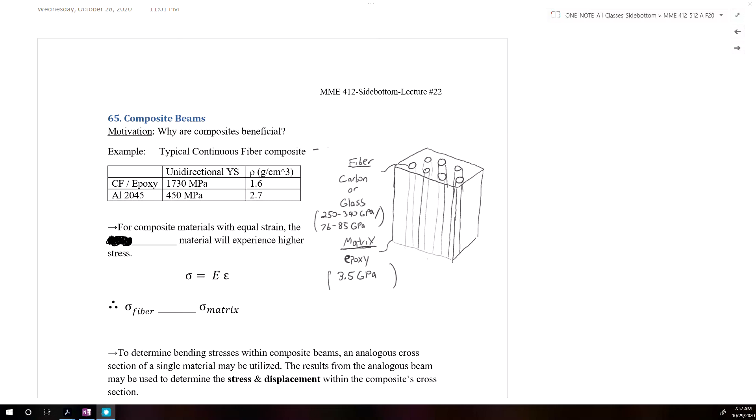So in today's video we're going to talk about composite beams. Why would engineers be interested in using composite beams? I think the major reason engineers are interested in using composites in general is that they typically provide very high strength relative to their weight.

For example, if we're talking about continuous fiber composites, often used in aerospace industry, a carbon fiber and epoxy composite's unidirectional yield strength, along the direction of the fibers, can be as high as 1730 megapascals, which is incredibly strong, while its density is only 1.6 grams per centimeter cubed. Comparing that to a typical aluminum alloy used in composites, aluminum 2045, the composite is about 4 times stronger along the continuous direction, and it's about 2/3 of the weight.

So you're saving about 2/3 of the weight, and you have about a 4 times increase in strength. So the strength to weight ratio is like 7 times higher than that of aluminum. That's an incredible savings in weight, which improves efficiency overall of the structure and gives you a little bit more freedom in your design.

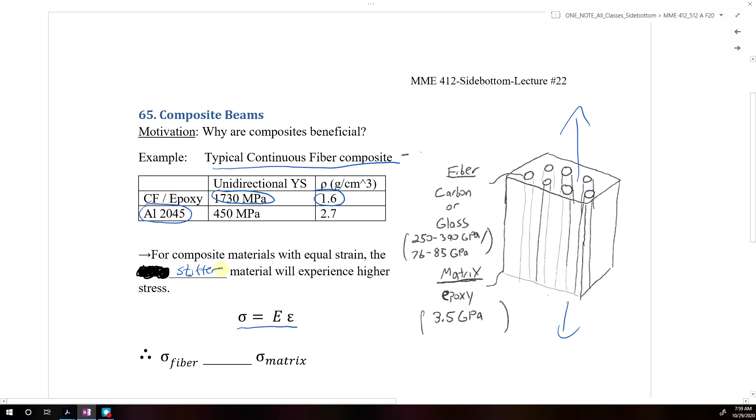When we're talking about composite materials, our composite analysis is really based off of Hooke's law. If we have a composite material with two materials in it, one material will be stiffer than the other. The stiffer material, for a given strain, will experience a higher stress. So if we have a fiber and a matrix, the fiber is much stiffer than the matrix, so the stress within the fiber of our composite is going to be much greater than the stress in the matrix.

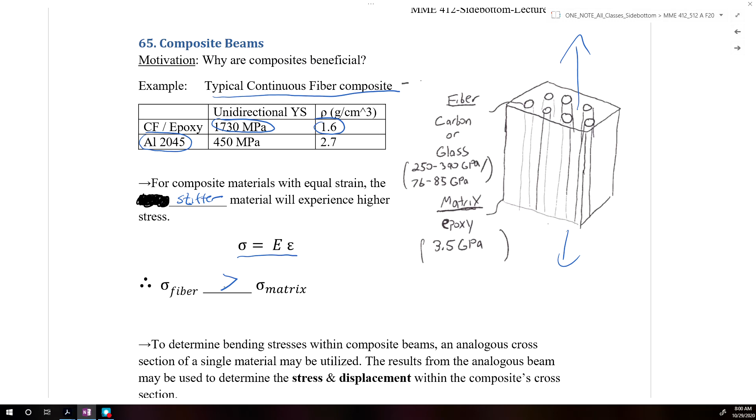What we're going to be looking at today is composite beams, and we're going to evaluate the stresses within the composite beams. We're going to create something called an analogous cross section, or an equivalent cross section, of a single material. Using this single beam, we can then determine the stress and displacement. So with the equivalent cross section, we can calculate the stress and the equivalent displacement within the composite material.

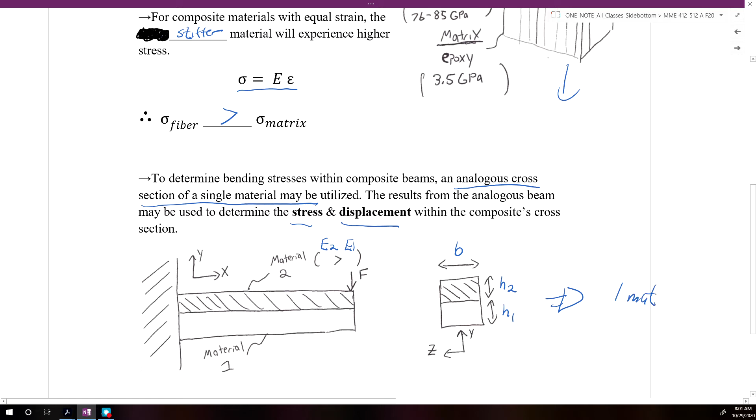For example, if we have a cantilever beam here that has two materials, material 1 and material 2, we'll say that material 2 has a greater stiffness than material 1. We're given the dimensions of the beam as having a width b, and the thicknesses of our two materials are h1 and h2. So what we're going to do is create an equivalent cross section based off of this system. We're basically going to convert this to a one-material beam.

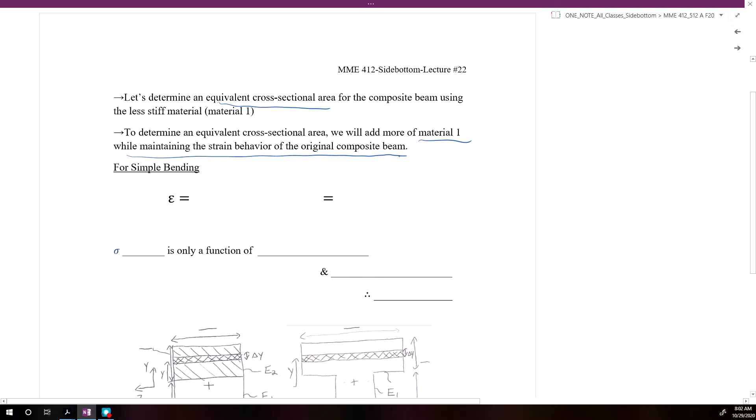We're going to determine an equivalent cross-sectional area for the composite beam using the less stiff material, in this case material 1. So what we're going to do is add more material 1 while maintaining the strain behavior of the original composite beam. For simple bending, we know that strain equals stress divided by modulus of elasticity, and our bending stress equals negative M y divided by I z. Based off of this equation, our stress is only a function of the moment, M of x.

Along the length, the moment might change, and the second thing it could be a function of is y, the position relative to the centroid. Therefore, what we can say is that the width of the beam can be modified, because the strain is independent of B.

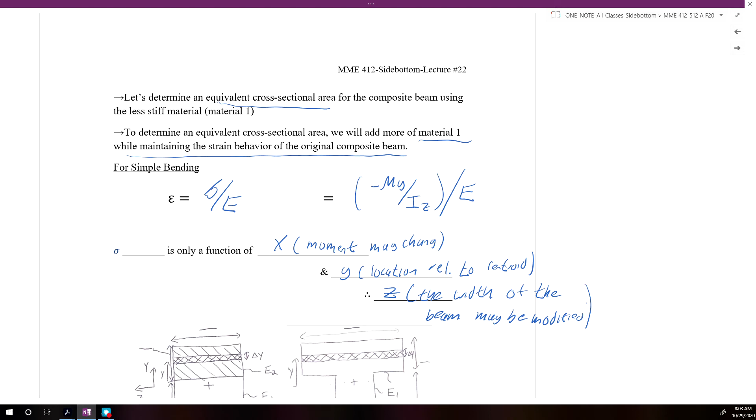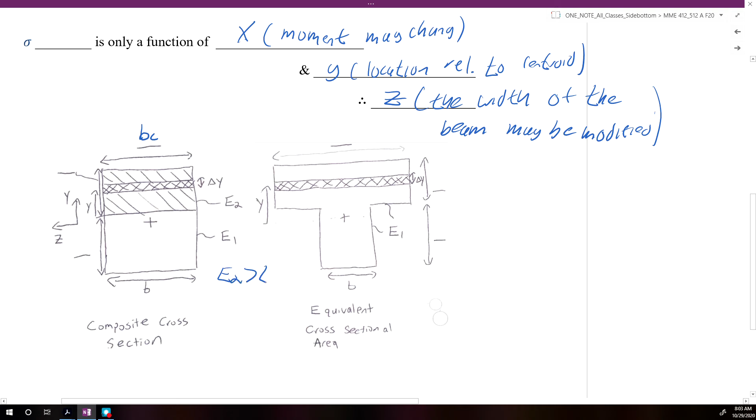So if we start off with a composite cross section that has two materials, E2 and E1, remember that E2 is greater than E1, and the thicknesses of the two materials are H1 and H2.

What we're going to do is find an equivalent width of our section, labeled as BE. H2 will remain the same here, and H1 will remain the same. So we're going to convert this composite cross section into an equivalent cross-sectional area of just material 1.

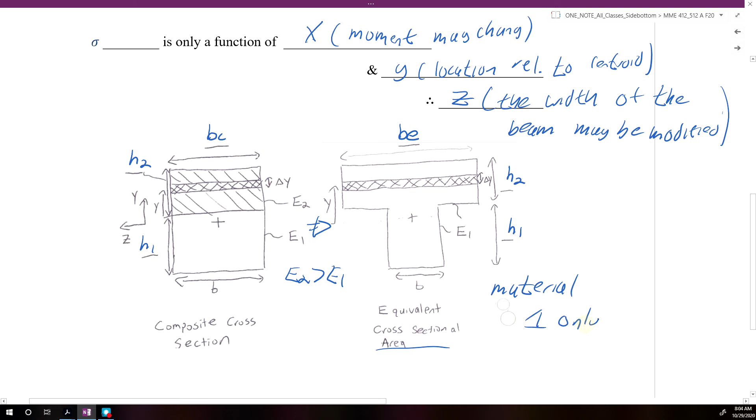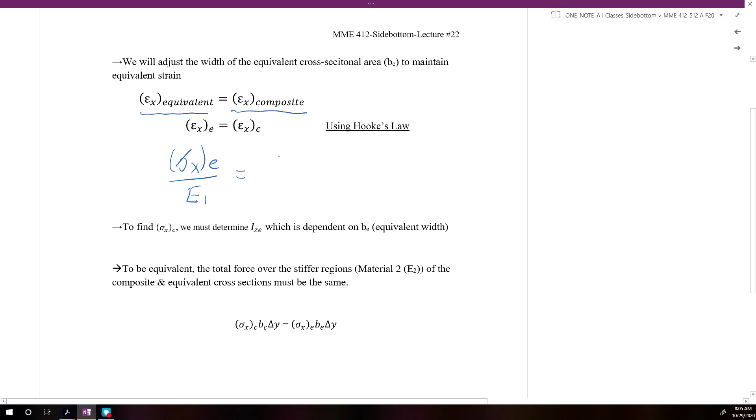We will adjust the width of the equivalent cross sectional area to maintain the equivalent strain. The equivalent cross section must have the same strain as the strain within the composite. Using Hooke's law, the strain within the equivalent composite, sigma x e divided by the elastic modulus of material 1, must be equal to the stress within the composite material divided by E2.

From that, we can say that the stress within the composite would be equal to the ratio of E2 over E1 times the stress within the equivalent section. And then we can write that stress within the equivalent section is equal to minus My over IZE, where IZE is the equivalent moment of inertia for the equivalent section.

So in order to determine the stress within our composite, we have to determine what IZE would be equal to, and that's going to be dependent on the equivalent width of our composite.

The second thing we need to know is that for this system to be equivalent, the total force over the stiffer regions of material 2 and the equivalent cross section must be the same. So the force within the composite has to be equal to the force within the equivalent section.

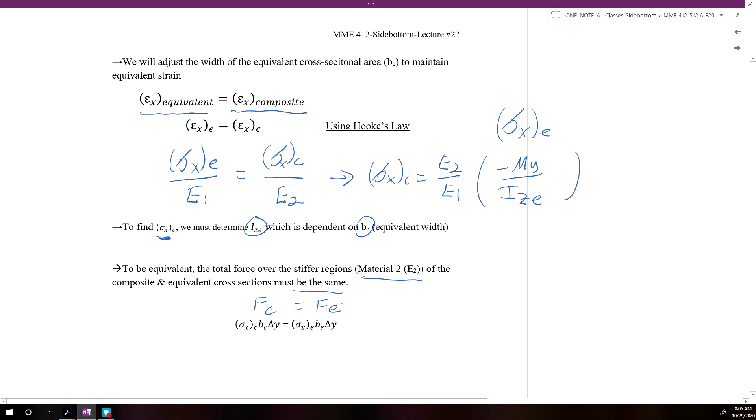So we can rearrange this and solve for the equivalent width BE. BE could be equal to sigma x c, BC, delta y, divided by sigma x e, delta y. The delta y's will cancel out.

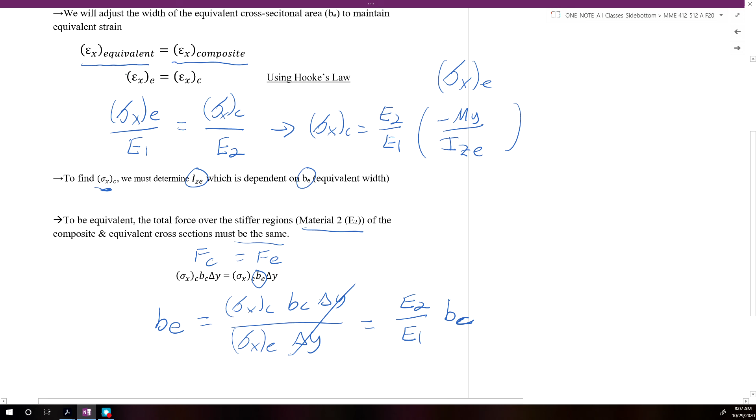We'll be left with, if we plug in our values of sigma xc and sigma xe, we end up getting E2 divided by E1 times BC. This is because the stress is just going to be equal to the strain within the composite sections, and the equivalent section are equal to each other. So the only thing that changes is the elastic moduli.

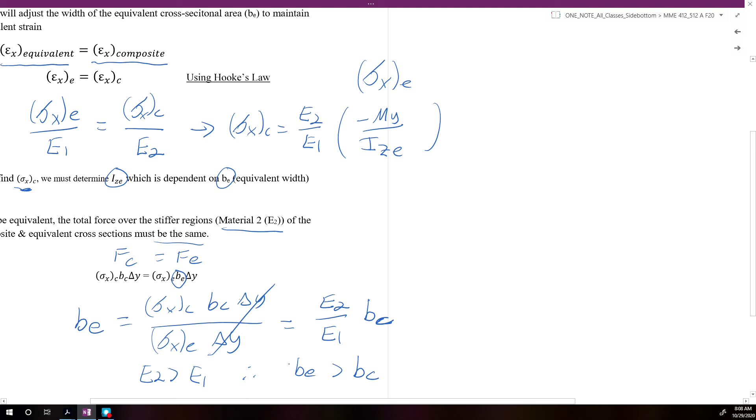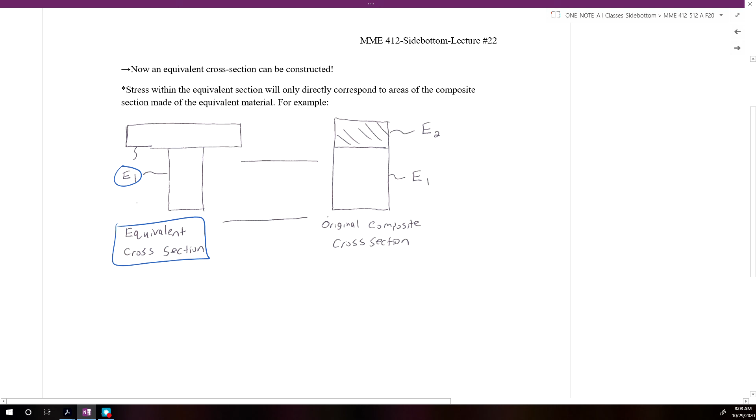Since E2 is greater than E1, we know that BE must be greater than BC. Now that we know how to calculate BE, we can create an equivalent cross-sectional area. Within our equivalent cross-section, the equivalent cross-section is all made out of material 1, while the original composite section had our two materials, E1 and E2.

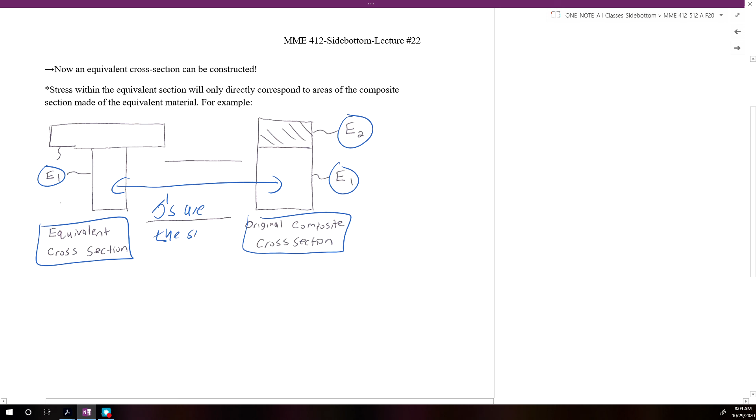Between these two regions where we have our same original material, the stresses are the same within this region. Within the other region of the beam, the stresses will not be equivalent.

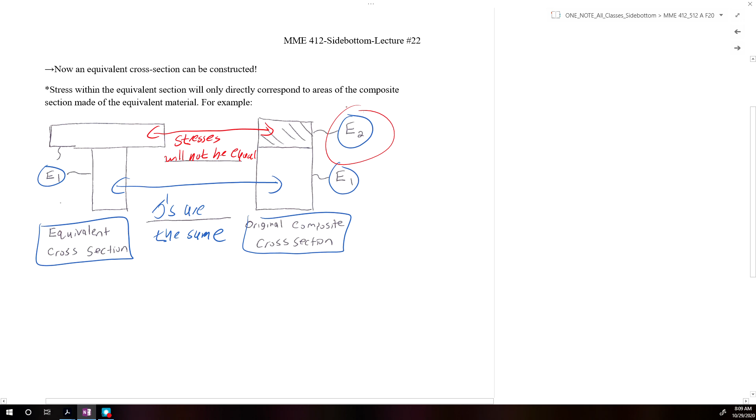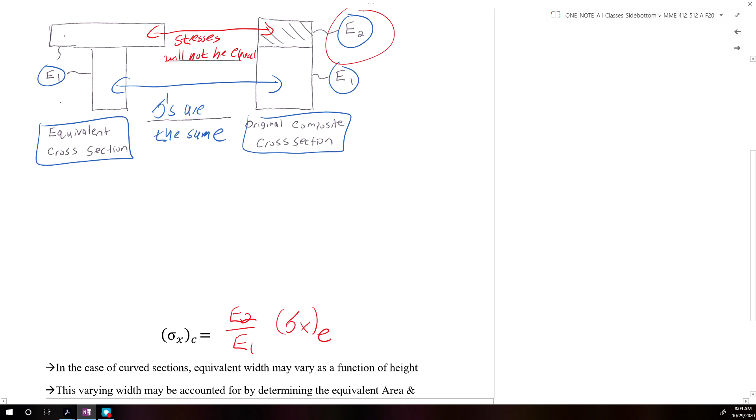The stress in the equivalent section here will underestimate the stress that's actually going on within the second material E2. So in order to calculate the stress within the composite area or within material 2, we have to multiply the stress within the equivalent section by the ratio of E2 over E1. Whatever stress we calculate in this region, we need to multiply it by E2 over E1 to get the stress within this region.

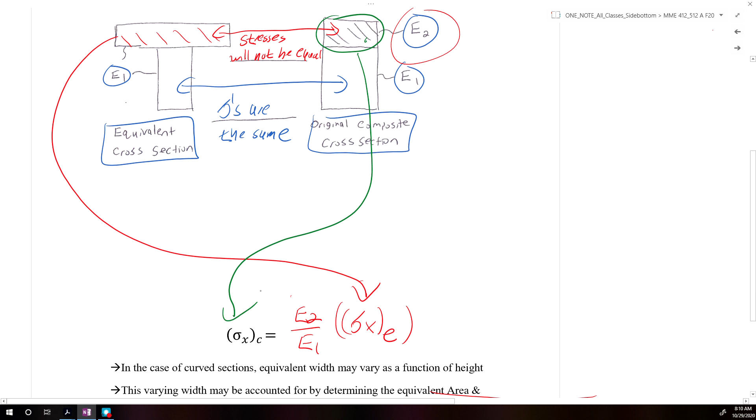A few last notes: in the case of a curved section, the equivalent width may vary as a function of height. You can adjust for this by accounting for the equivalent area and the equivalent moment of inertia, which only vary linearly with the change in width.

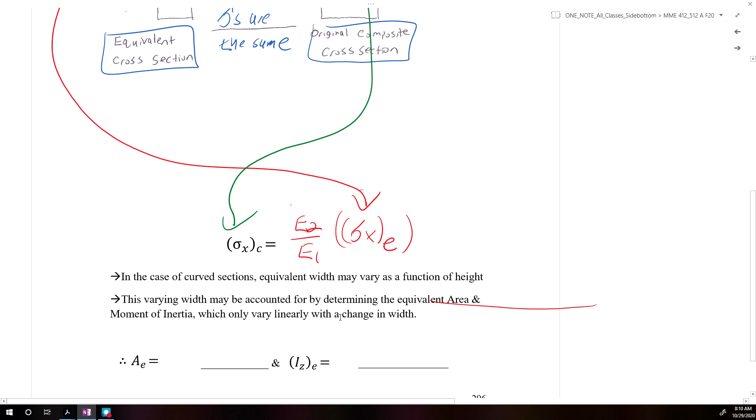So we can say that the area equivalent would be equal to the ratio of E2 over E1 times the area of the composite, and then IZ of E would just be equal to E2 over E1 times IZ of the composite section.

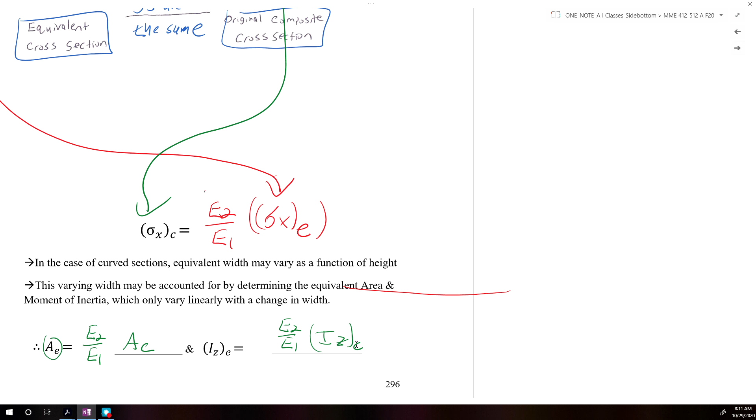If we know the equivalent area and the equivalent moment of inertia, we can calculate the equivalent stress for both axial and bending loads.

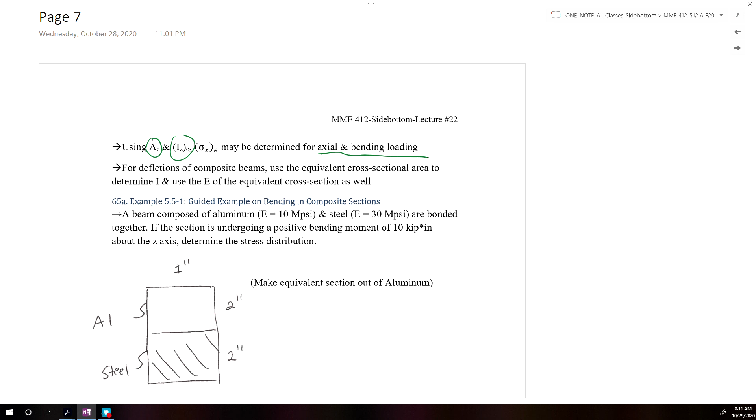The last thing is that for deflections of composite beams, you'll use the equivalent cross-sectional area to determine the moment of inertia, and you can then use the elastic modulus of the equivalent cross-section in the bending equations to determine the deflection.

So we're going to do an example problem that will illustrate how we can apply this to a composite section, applying these methods to composite sections to determine the stress within both an aluminum and steel composite.